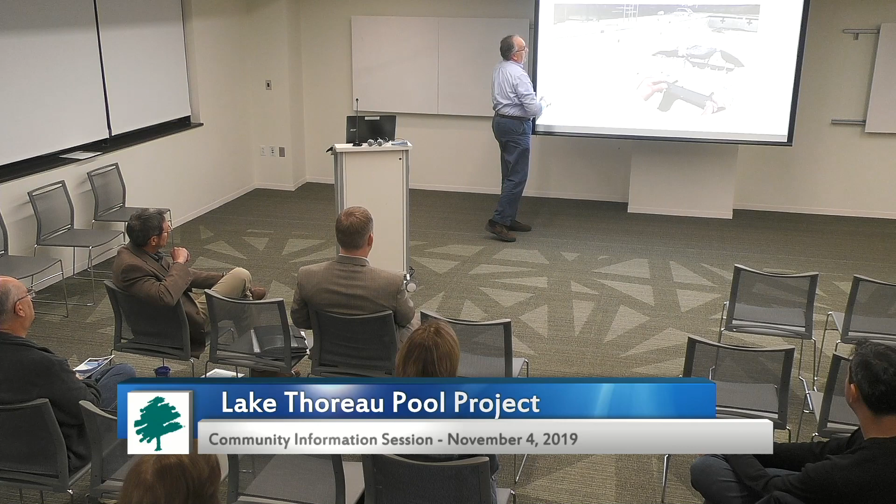Some of you are aware of this. This pool is roughly 40 years old. Last year, you had a crack in the lap pool side, the lakeside side of the wall, which was repaired with staples. I don't know if any of you have seen that. That is a temporary fix. Chris will go on to explain why you had that crack and why that wall is involved with it, and why that wall needs to be replaced and the pool's no longer safe for you to use.

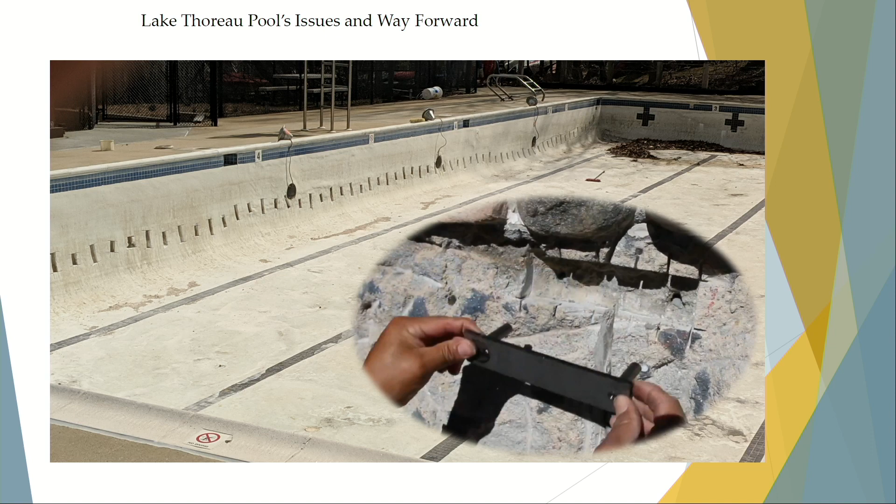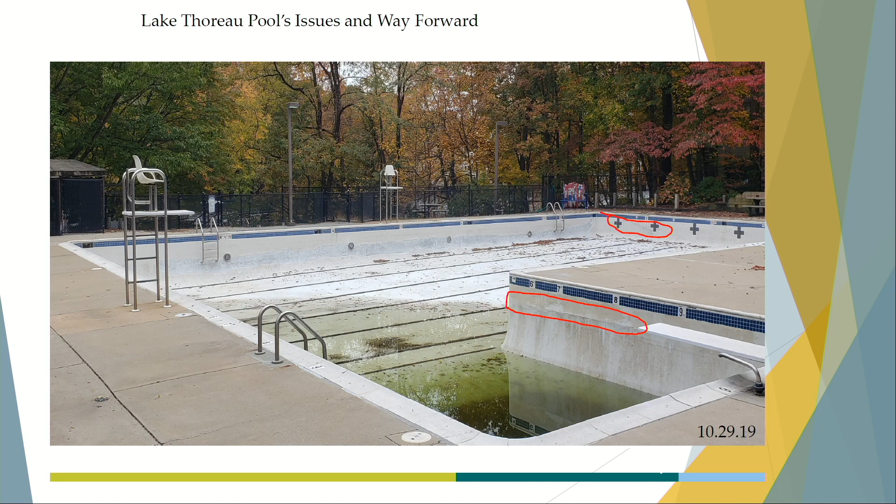So the basic question: why $350,000? Because, as I said, it's 25% of what we believe it will ultimately cost to replace the pool, and that money is used for things like planning and community engagement. I say community engagement because Larry will explain how we've done this for 4 other pools, where the community is very involved. It includes design, engineering, DRB review, and possibly permitting.

Why can't the wall just be replaced? If you've walked behind that wall, you'll see that in some places it's within 10 feet of the lake, and it's incredibly soft soil. Additionally, just replacing the wall isn't a solution when the wall is 40 years old, and what's behind it and on the decking it supports isn't safe. You can't just take the wall out and replace it—you have to remove a significant portion of the pool. Chris will explain the pool decking situation.

Why can't the pool stay open during 2020 for the planning, design, and engineering process? We've had an engineering study, and it's convinced us it is not safe. So as a management decision, we're not going to allow you to use the pool because we don't believe it's safe.

How long will the project take? Larry will tell you this, going through all the steps involved. As I shared, we've done 4 of these in the past, and it will probably go the same way. We believe if it stays on track, the pool will be open in the spring of 2022.

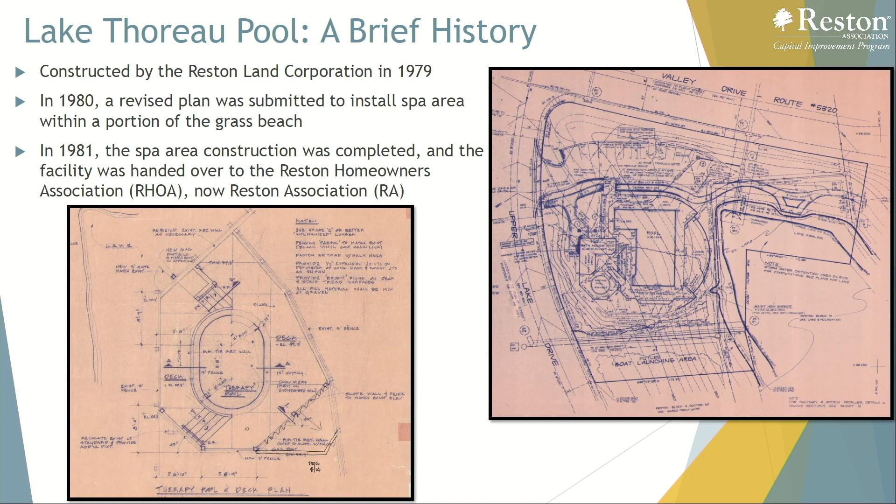I just want to give you a quick overview of the history of Lake Thoreau Pool if you're not familiar with it. It was originally constructed in 1979 by the Reston Land Corporation, and then in 1980 we submitted a revised plan—the original design didn't actually include a spa. That was kind of an afterthought from the original construction. In '81, they completed installation of the spa, which is this design right here, in this little corner.

So just to give you an idea of how a retaining wall is designed, since some of you might not be familiar with this: a basic timber retaining wall is constructed using wooden timbers with what's called 'dead men.' Dead men act effectively like a ground anchor. This beam is connected here with basically railroad spikes about yay long, and this T off the end acts as the anchor that's underground—all under the soil.

In modern designs, you actually have a drain line running along the bottom edge, which helps relieve any hydrostatic pressure. The design used back in '81 didn't include that—all they did was puncture 1-inch holes about every 4 feet on center along the bottom row, and that's what facilitates drainage. It's not very effective, but that's how they did it back then.

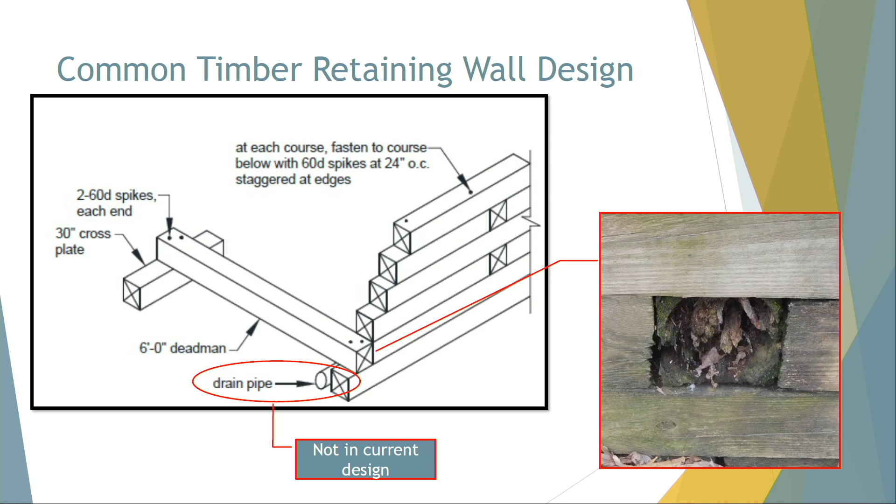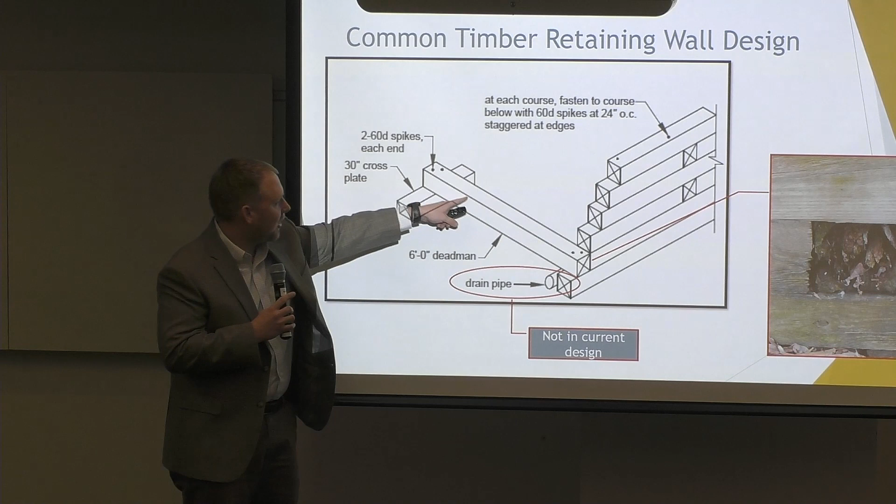That image to the right is a picture from Lake Thoreau, showing one of the dead men on the front. If that picture gives you an indication of what it looks like at the surface, there's a good chance that underground it looks similar—it's rotted out, like this face right here, and there's a good chance the piece supporting the wall underground is in a similar condition.

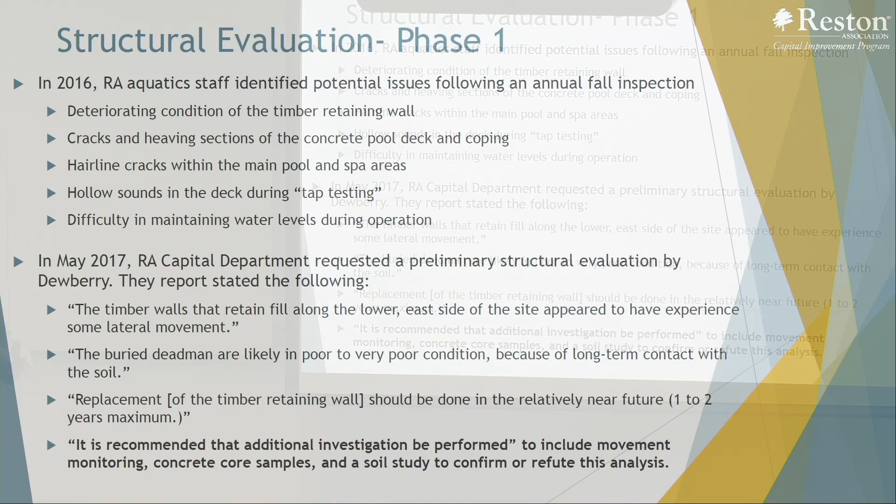Let me walk you through the whole structural assessment that was performed. We look at it from two different phases: there's the qualitative piece and the quantitative piece.

The qualitative piece is the original piece back in 2016 when RA staff do their annual inspections. We do this at every facility, going through and looking for anything that might need repair, whether operational or capital.

In 2016, we started noticing a few issues at the facility. The retaining wall was generally starting to degrade at an accelerated rate. There were some cracks and heaving in sections of the pool decking and coping, and hairline cracks within the pool and spa areas.

There were hollow sounds in the deck, so when you walk around and tap the deck, the concrete sounded like a drum, meaning there might be voids underneath the concrete that's no longer being supported. We also started having difficulty maintaining water levels in the pool, which means there's a leak. So in 2017, before opening, we tasked Dewberry to do a preliminary structural evaluation.

At this point, they're only making observational looks. They also did record research, looking through all their old plan sets and other information from Fairfax County in terms of soil studies and soil composition.

They determined initially that the timber retaining walls that retain the fill along the Lower East Side of the site appeared to have some lateral movement. They noticed there was some movement of the wall.

The buried dead men are likely in very poor condition because of long-term contact with the soil, hence that dead men view of it being very rotted out. Replacement of the timber wall should be relatively in the near future, within 1 or 2 years. This was back in 2017.

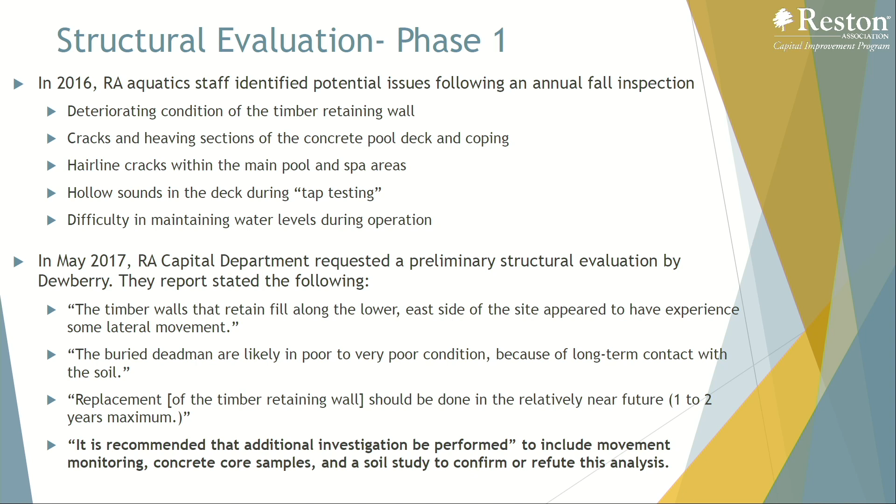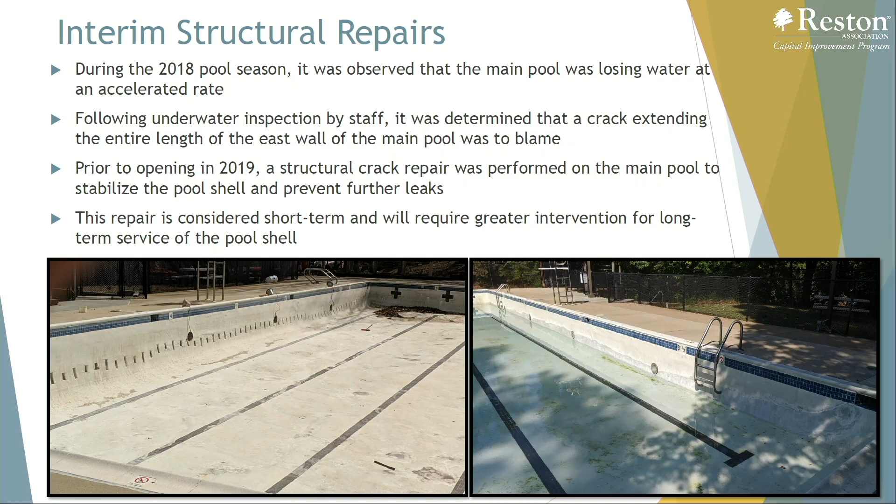As Hank described, we performed a structural staple installation. Each one of these cutouts is one of those steel staples. It basically holds the crack together and stabilizes the shell to prevent any future movement and help stem the leak, but it's not a permanent fix.

This is kind of a short-term solution. To do it properly, you actually need to go in, rip out that portion of the shell, reinforce any rebar underneath it, and then reshoot the pool with new concrete.

So phase two, this is when you get into the quantitative piece of the investigation. In 2019, this year, we hired Kimley Horn as our on-call engineer to perform a follow-up investigation using Dewberry's recommendations as the basis of their evaluation.

They took all the recommendations suggested for follow-up, which included 10 concrete core samples and soil samples. They did compressive testing on all those core samples, and also installed 14 crack monitors, which is what you see right here.

Those will continue monitoring for the next 6 months to see what kind of movement and what rate we're looking at in different areas. On October 23rd, the final report was given to staff, immediately given to the board, and then presented to them at the 24th meeting.

That far sample right there is a core sample, and you can see the buildup of plaster over time. That's 40 years' worth of white coats, about 2.5 inches.

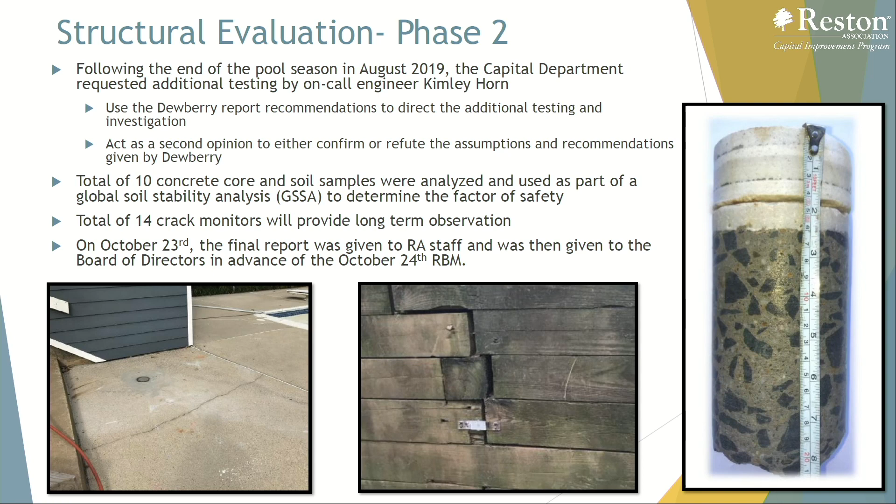So the primary results of the study: visual observations and geotechnical explorations of the site indicate that the eastern perimeter timber retaining walls adjacent to Lake Thoreau's water surface have slightly rotated and crept towards Lake Thoreau. So it's no longer just a general observation, it's a confirmed observation.

The observed cracking in the pool and deck, slant sloping, and displacements are general indications that the wall has moved and portions of the pool have moved with it as a result. They also did a global stability analysis of three cross sections of that wall area.

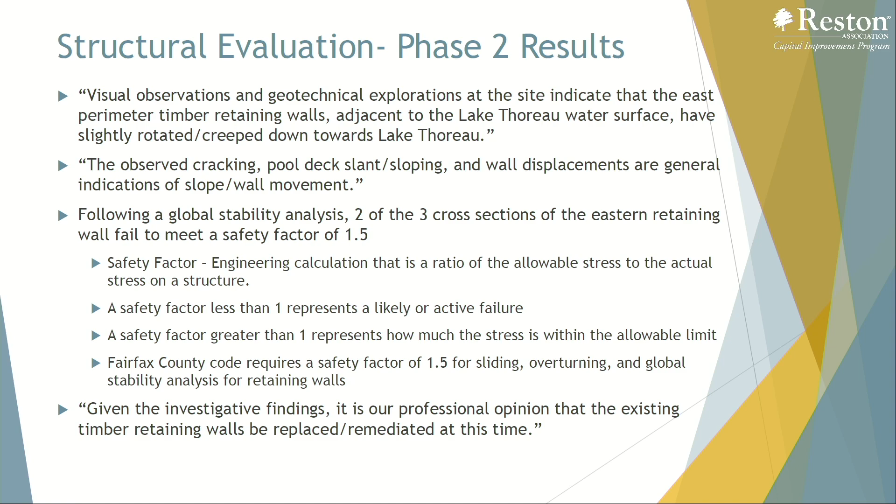What one of these stability analyses does is use all the data from the soil samples, the concrete samples, and any other available data to create what is known as a safety factor. A safety factor is an engineering calculation of the ratio of the allowable stress to the actual stress in the structure.

A safety factor of less than 1 represents a likely or active failure. Anything over 1 represents how much stress is within the allowable limit. So 2 of the 3 cross sections are below 1.5, which is the Fairfax County minimum requirement for a safety factor on a retaining wall. One was actually at about 1.1, which is very close to an actual failure point.

So given all this data, investigators find as a professional opinion that the existing timber retaining wall be replaced or remediated at this time.

Due to these findings, any updated timeline before an immediate replacement is not suggested because of liability concerns. An engineering firm cannot guarantee this wall for another year at this point because it puts all the onus on them if something should happen. So they can't give us a timeline.

Out of an abundance of caution, any portion of the facility at this stage that's open is a liability. So the whole facility needs to stay shut down until this is addressed.

The replacement of the retaining wall should use a concrete footer that's going to be potentially 6 feet in depth and approximately just as wide. A concrete wall is suggested over timber because of its longevity, but it's obviously far more expensive. The biggest problem is access to the wall.

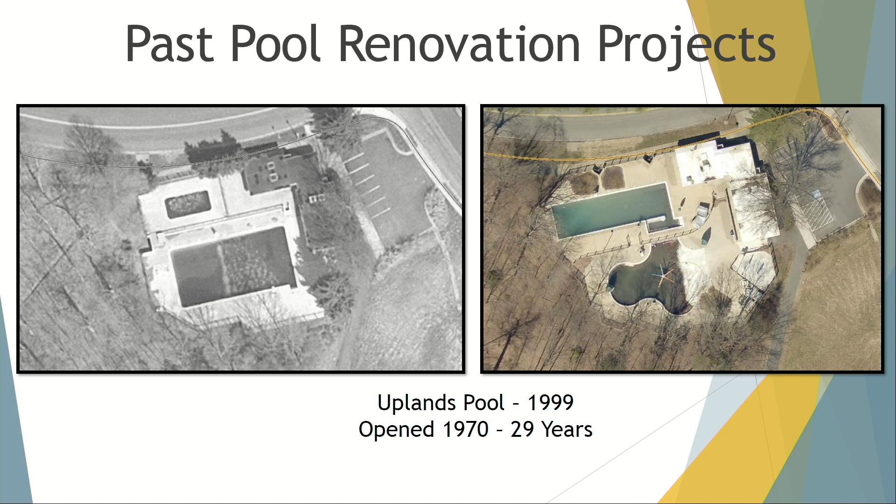The other important note to make on all these is we made these pools accessible. In each of these renovations, we made them to the ADA code at the time, and with the county code, we made them fully accessible. In a lot of cases, we had to do a lot of work on the pool shell in particular, and renovate and do articulations in the bathhouses. Because some of these bathhouses are concrete block, it's a little more difficult than working with a timber or frame structure.

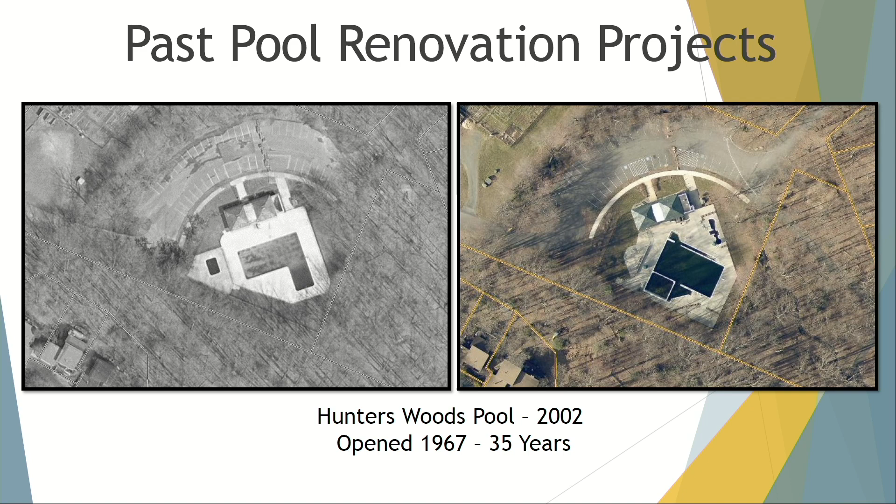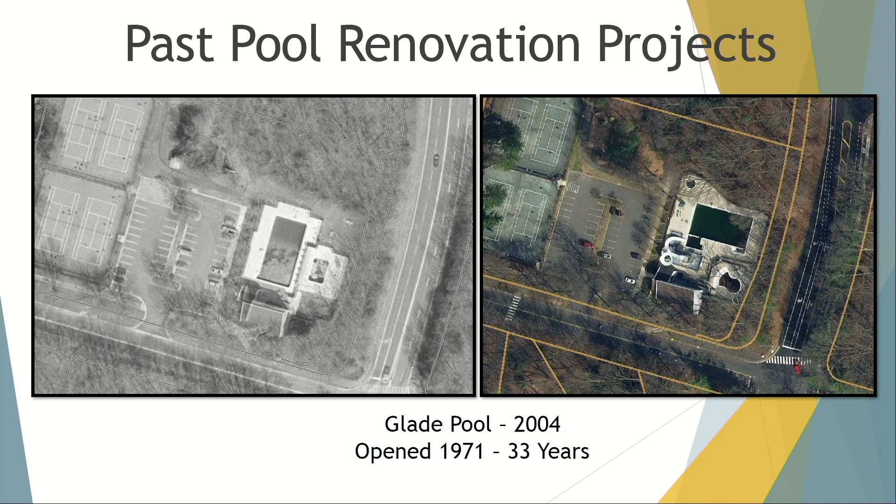And then, of course, Glade Pool. One of our coolest features, the 21-foot slide tower, something like that. Again, a dramatic difference there. It also got the hot tub at the back, or the spa. Again, this one was done at the ripe age of 33 years. And then our most recent one is Dogwood Pool, not too far from this office. We actually put in an outdoor fountain and a pavilion so it's accessible for those people who choose not to get pool passes. This has been a really popular facility as well. Again, that one was done at 32 years of age.

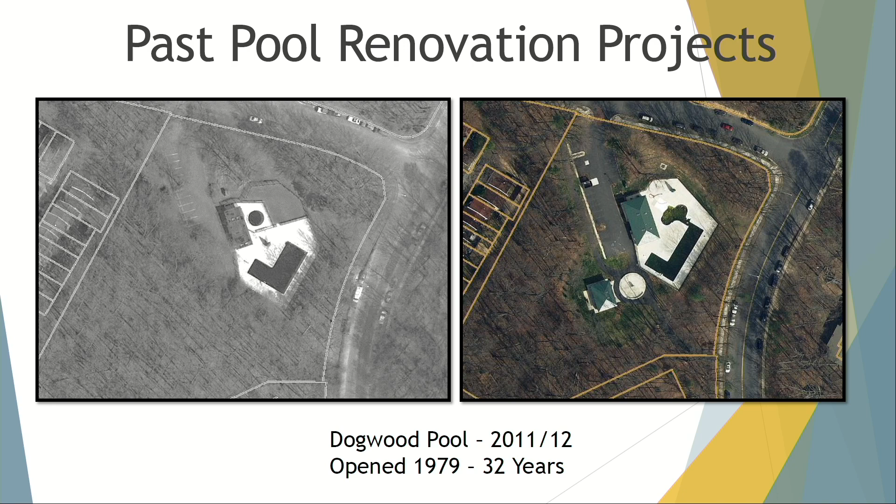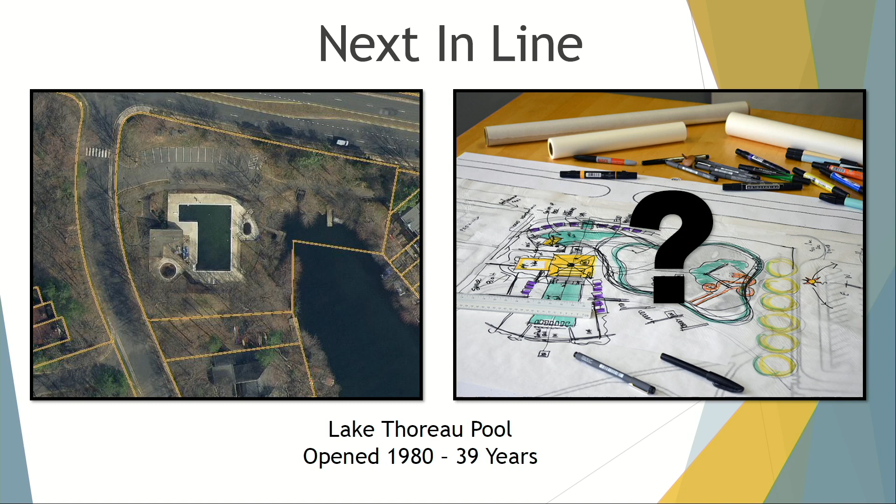But as Hank said in his opening remarks, these projects take a long time. Has anybody here tried to get a house renovation approved through Fairfax County? How long it takes to get the building permits and so forth? It's not real easy—it takes a long time.

This particular project, if we do the pool, considering the ADA improvements, there's a lot of grade that has to be contended with—the plumbing, electrical. Chris didn't mention this, but there is, I think, an 8 or 10-inch sanitary sewer line that runs right behind that wall, parallel to the lake, and that's in an easement in favor of the county. So it's not like we can go in and work on top of their sewer line. There's lots of restrictions, and there's also a power line back there as well. So there's a lot of things to contend with, and those things take time.